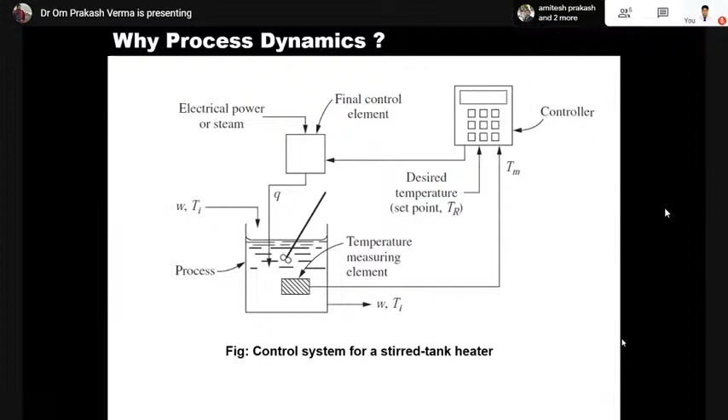Based on that, we understood the difference between the open loop system and the feedback system, and then we discussed the feed forward control system and feedback system.

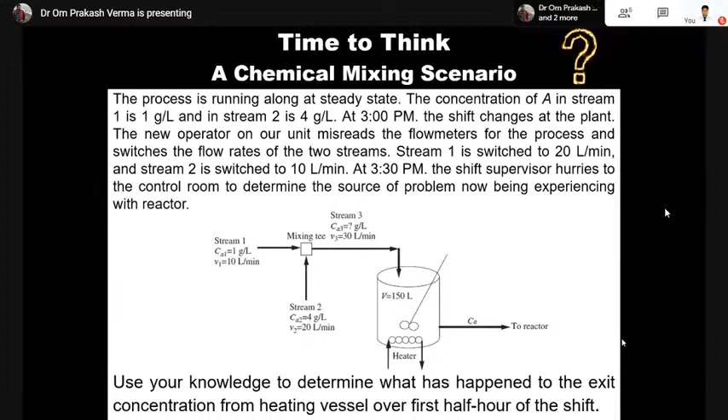Then we discussed some questions on why the process industries are important, and to that end we discussed the problems regarding operation control for the process industries, including heat transfer and mass transfer type problems.

Then we saw the transients, discussed different types of process models, and discussed the different types of modeling equations—which types of equations usually occur or are developed in the mathematics for the system model.

The system model generally consists of algebraic models, ODEs, PDEs, and combinations of these—maybe a combination of ODE and PDE, or all three together. Then we discussed the types of models in terms of linearity and non-linearity.

Then we discussed static and dynamic systems. In the dynamic system we discussed the accumulation term, and we discussed the case where d/dt in the dynamic term equals zero.

Then we discussed lumped parameter and distributed parameter models, and solved one example using distributed parameters for heat conduction in a solid.

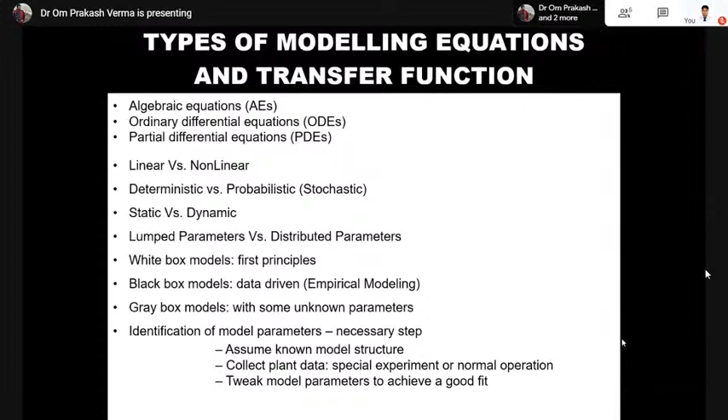Then we discussed the different types of models using white box, gray box, and black box approaches, and also looked at a regulator type problem.

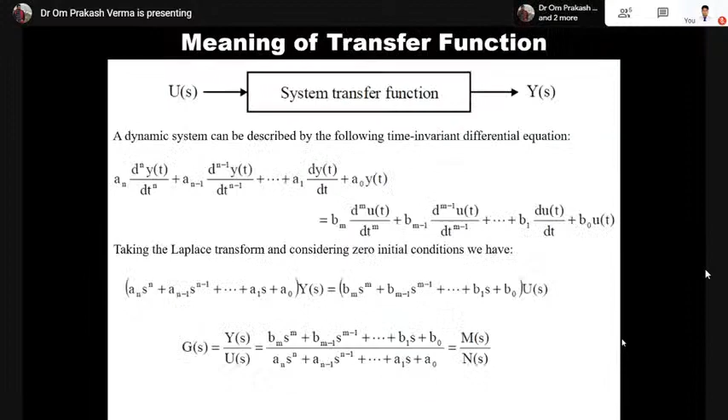Then yesterday we discussed the transfer function—the concept of transfer function, what is the meaning, the real meaning of transfer function.

We developed some equations for an electrical system, then a mechanical system, and I gave one example as an assignment, but due to the unavailability of the PPT we have not solved it yet. I know, but try to solve it today—I will give this PPT to all of you, so try to solve this puzzle.

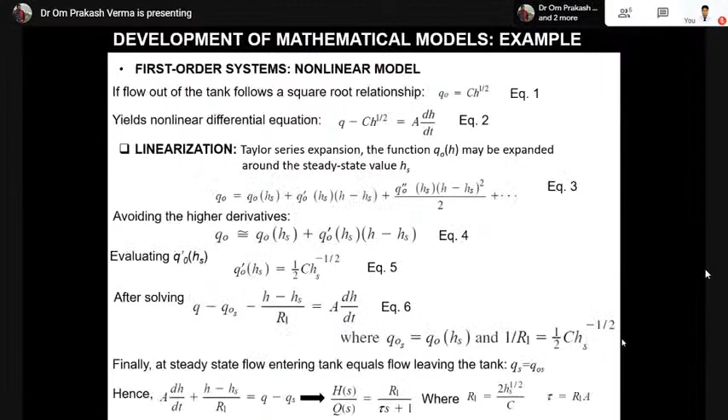Then we discussed the first order transfer function of the liquid level tank, and then linearization techniques. We will discuss these things more after some time.

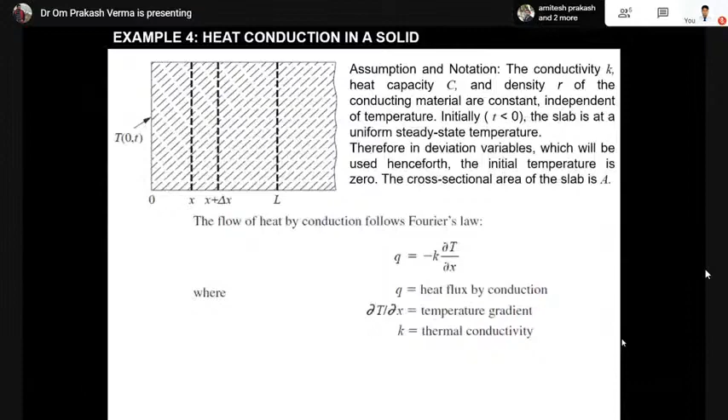Then we discussed the distributed parameter model, that is the heat conduction of a solid, and concluded with the state space equation—how the state space equation has been written for the mass spring damper system. So I am starting again with this PPT.

In the state space equation, what we learned in the spring mass damper system, which is basically a mechanical system: when we write the equation for this system, the force acting on the mass is ma, that is m into d2x/dt square. The force acting on the spring is kx, and the damper force is bv, damping coefficient into velocity, and that velocity is written in the form of dx/dt.

Here the displacement is written in the form of y, however the force is acting in terms of u. So when the equation is rearranged after writing, then this is written.

When you multiply this, it becomes ma, then f dx/dt—this is the damping force. Generally in the book, B is written; we have used the symbol f, but there is no problem, both are the same. However, the key is the Hooke's constant, that is the spring constant, k into x. So this is basically the force.

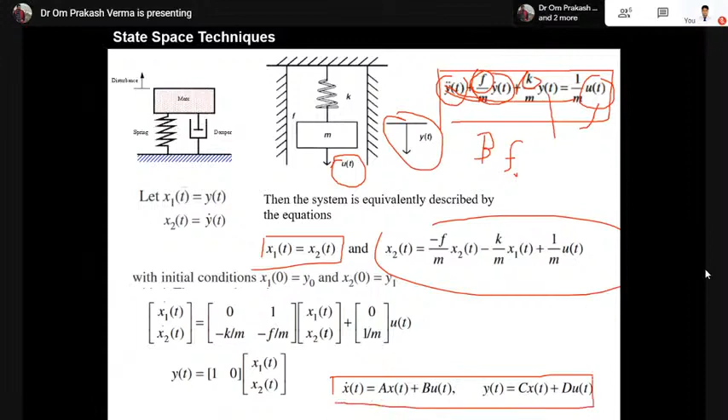So when you generalize the state space equation, I'm not going into details of it because this will be taught in the class, your teacher will teach it in the class. So I will just take the overview, so that we can cover more and more topics that are not usually covered in the class, more aspects of the control system that will not be covered in the class.

So x1 dot is equals to f(x1), this one. This is a generalized equation, whereas x1 is the state variable and u is the input, and similarly for here and similarly for the n variable.

So when written in vector form, x is a vector and it comprises of x1 to xn, where x is x1 to xn, and u is u1 to um.

So how is the matrix equation written? x1 dot is equals to a11... you can see here x1 dot is equals to a11 into x1, and similarly we can write here. X1 dot is equals to a11 into x1, a12 into x2, a13 into x3, and so on, a1n into xn. Similarly we can write all the equations. That is your state equation.

So finally, the compact equation we can write like this: x dot is equals to Ax plus Bu, y is equals to Cx. Okay, so now see, I will try to develop one.

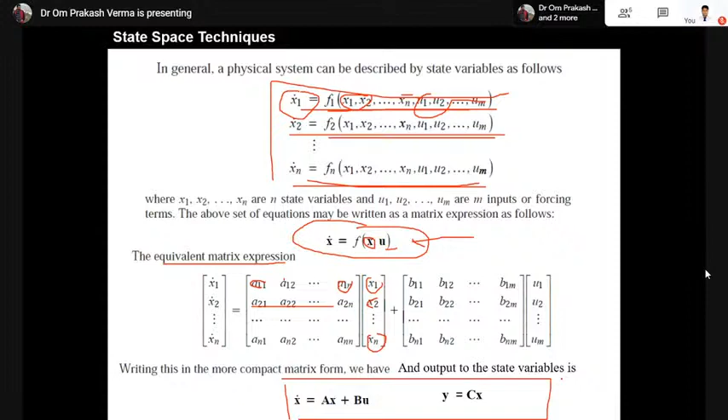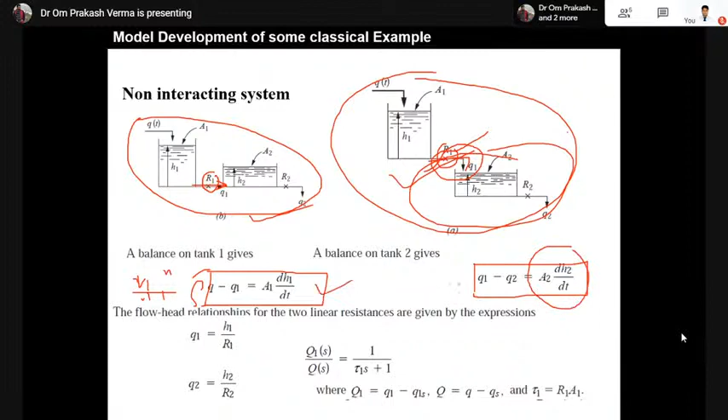As we know, if the valve R1 shows linear characteristic, then the equation is written as q1 equals h1 by r1. Similarly, when you write the equation for the second tank, q2 equals h2 by r2, and this equation is only valid for the linear system. So put this value of q1 and q2 in, and solve the two equations.

After solving the equation, we already know from the first system what q1 is, the output flow rate, and what the input q is. So the transfer function, I am repeating once again, is the relationship between output and input in Laplace transform, taking all initial conditions as zero. We have already discussed why the initial condition is zero, why we have taken the Laplace transform, due to the need of the system. We could also take the Z transform, but we have to establish the relationship between output and input, so therefore we have taken this.

So now the q1s upon qs becomes 1 upon tau 1s plus 1. No problem, and we have already solved h1s upon qs as equals to r1 upon tau 1s plus 1. In the previous slide we have already discussed this.

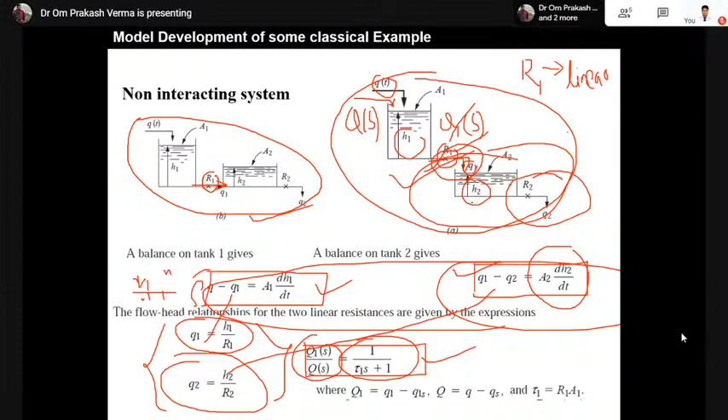So what is h2s upon q1s? Similarly, as h1s upon qs becomes r1 upon tau 1s plus 1, h2s upon q1s, that is the level output upon input flow, makes the relationship r2 upon tau 2s plus 1.

So putting all this together and solving, you get the final output, the level of tank 2. We have to control the level of tank 2 with the input, the first entering feed flow, qs. So ultimately the relationship q2s, h2s upon qs, becomes r2 upon 1 plus tau 1s, into 1 plus tau 2s. So you can see this is nothing but a second order system.

Second order system, how is this a second order system? When you multiply this, it becomes tau 1 tau 2 s square plus tau 2s plus tau 1s plus 1. And when you solve, it becomes R2 upon tau 1 into tau 2 s square plus tau 1s plus tau 2s plus 1. So this is your final equation, and this is the standard equation in terms of any second order system.

Now the time for some simulation. I want to discuss here the response time, the response of the two tank system.

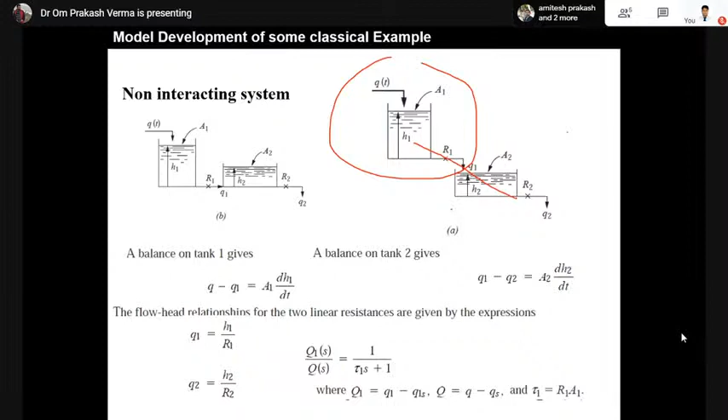Once we said this is your basically one single tank system, and when it comprises two tanks, it becomes a double tank system. So when we compare the response of the one tank and two tank system, obviously the one tank system is faster. The response of the single tank system is faster than that of the two tank system. So how is it? How can we find the response?

So in MATLAB you can write your code, otherwise you have to make a Simulink model also. With the help of the Simulink model, you can find the response of the system. Suppose this is the q, this is the step response. We will discuss what is the meaning of the step. Just to see what is the step, we are applying some staircase of input.

Okay, the staircase input has a unit magnitude of 1. In MATLAB, we just put in the values of the transfer function. Let's say tau 1, the first time constant of the tank, is 0.5, and the second is 1. When you simulate the system, this is an open loop system since we have not used any controller.

Similarly, this is the single tank system for the first tank. When we take the single tank system and compare the response on the screen, the output will come here. You can see this is the one tank system response, and this is obviously the second, two tank system response.

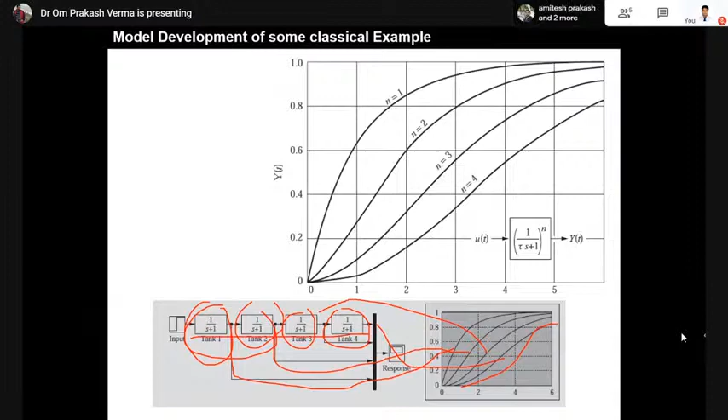When it is single, the response is like this. When it is two, the response is like this. When it is three, the response is then like that. And when it is four, the response is like that. So as you can visualize, as the number of tanks increases, the response of the system decreases. Now let's come to the interacting system.

Now another interconnection, another arrangement of connecting the two tank system, is this one. In this system, the output of the first tank enters the second tank with the help of some pipe. We are sending it using this pipe. This connection is basically known as an interacting system.

What happens basically is the flow rate here is Q1, let's say, and this is entering into the second tank. So what is the equation for tank one? Q in minus Q1 out equals whatever the accumulation is into the tank. Obviously for the second tank, Q1 is entering and Q2 is out, so we write in minus out equals whatever the accumulation into the tank.

Now the relationship of R1: since R1 is linear, it is dependent on this height and this height also. I'm repeating once again, this R1 is basically linear in both cases, we have taken the same, and R1 is basically a function of H1 as well as H2. As H2 or H1 changes, the resistance of that valve will also change.

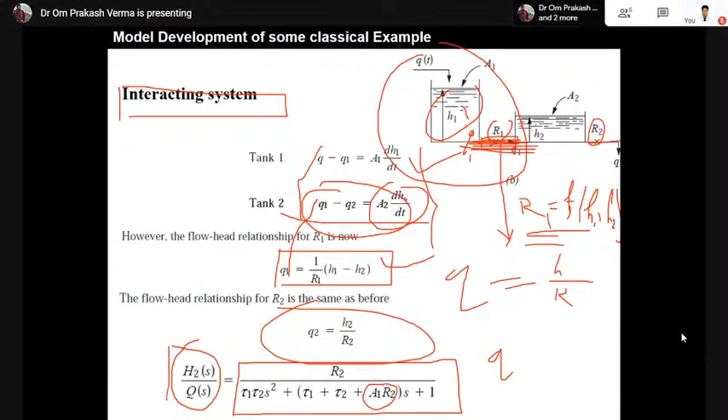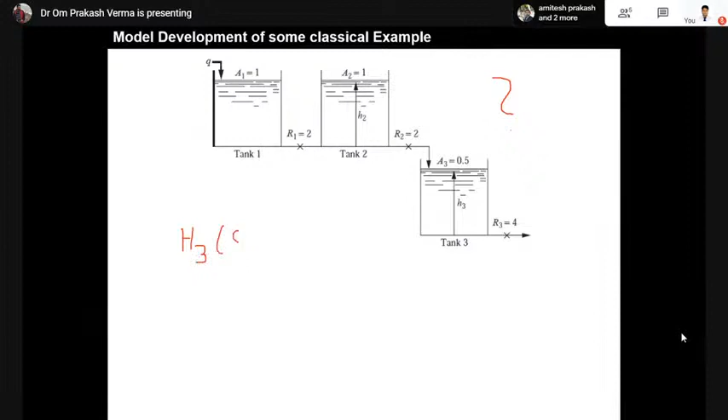Okay, so now your target, this is again a puzzle, so you have to solve this question. You have to develop this model and try to find out the transfer function H3 S upon Q S. Try to solve this transfer function. So this is one of your assignment problems. Try to solve it. If you practice such types of problems, then you can solve any type of model. This is usually used in the process industries.

We have already discussed that the state space equation is applicable for the non-linear system also. However, the transfer function is not available for the non-linear system. Also, the transfer function application is simply not applicable to the MIMO system, that is the multi-input and multi-output. However, that is only restricted to the single input, single output.

However, this is applicable for the multi-input and multi-output variable system. And one of the greatest advantages of using the state space technique is that we have written the equation in the form of some matrix, and MATLAB or whatever computer simulation generally uses matrix multiplication, matrix addition, and other types of matrix applications. Therefore, we are using this.

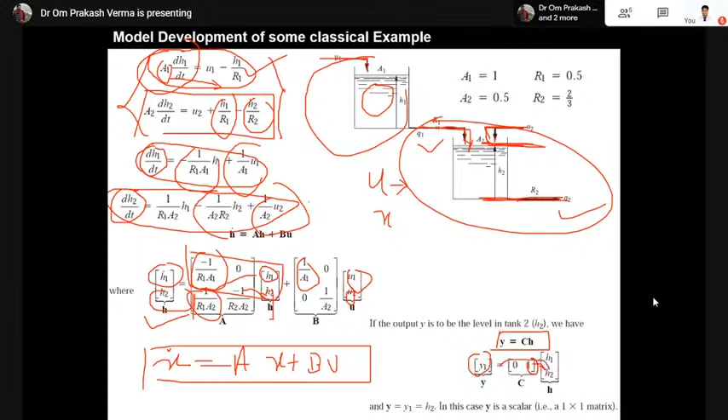We have to ultimately control this level h2. So simply, Y is equals to h2. So this one is the equation.

So y is equals to, we can write here C into X, plus somewhere we have written D U. Generally D matrix is 0, but this is the ultimate final format for the equation.

Okay, sorry for the interruption. Done. Wait for a minute. Wait. Sorry. Is my voice audible? Is it fine, Amitesh? Is it fine?

I think yes, sir, it is going smoothly. Yeah, okay.

So this is the final basic format: x dot equals Ax plus Bu, y is equals to Cx plus Du. And yesterday we already discussed why we have written the title ABCD of process dynamics.

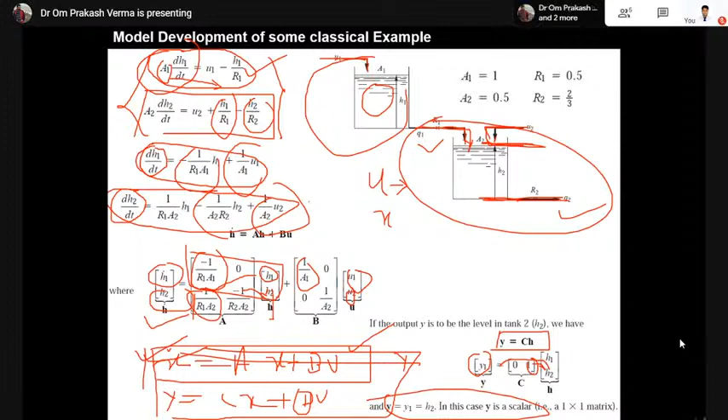So basically the state equations you have studied in the class will be the basic of control system in the third year. But once you get the knowledge of the basics of control system and enter higher study, you will encounter only the state space equation. So from the state space equation, the real control system starts. There's no problem.

So now we are entering into the world of transient traces, basically time domain analysis. In time domain analysis, the response of a dynamic system to an input is expressed as a function of time. Basically, we want to find out the transient of the system.

After applying some input, such as here, see this system. Let's say this is the transfer function, this is the flow rate, and this is the change in level of the second tank system. So when we change the input in tank one, the level of tank two will change accordingly.

So for getting some saturation for h2, it will take some time. So during that time, how much it will take for saturation, for settling, we have to analyze. So for that analysis, we have to supply some input and check what happens with the output.

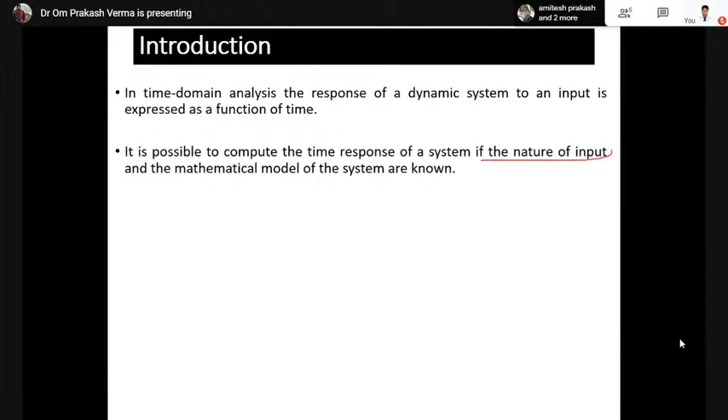For that purpose, we want to study time domain analysis. It is possible to compute the time response of the system if we know the nature of the input - what we are supplying as input - and second, the mathematical model of the system. I think we are enough equipped to understand how the mathematical model of the system is developed.

Now usually the input signal to a control system is not known fully ahead of time. In a real time system, the nature of the input we are going to supply is not known, how it's going to change we don't know. So we just take some classical testing signals and apply them, so that we can test the output response to the input. It is very difficult to express the actual input signal mathematically by simple equations.

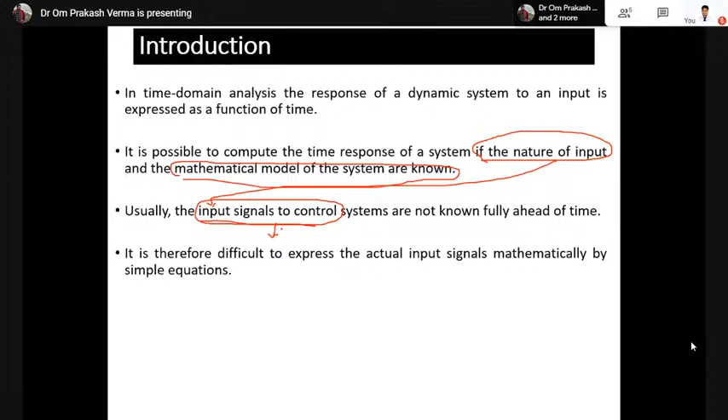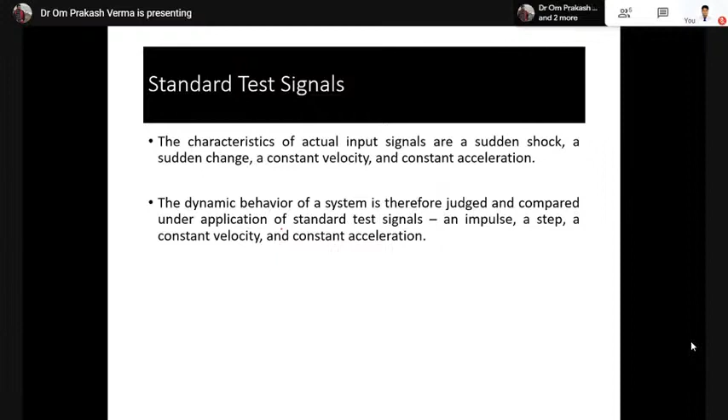However, we have developed some relationship for that input. The characteristic of the actual input signals is how suddenly the input is changing. So we analyze the different natures of the input, and try to mimic or develop such types of input in terms of mathematics. Once we develop the mathematical model and find the input, we apply it into the transfer function or model and visualize the response, the open loop response, as we already saw in the coupled tank system, whether interacting or non-interacting types.

So the general nature of the input is like a sudden shock. Sudden shock means, let's say at t equal to 0, in a very short time, the magnitude or value of the input is very very high at t equal to 0, then it is like a shock.

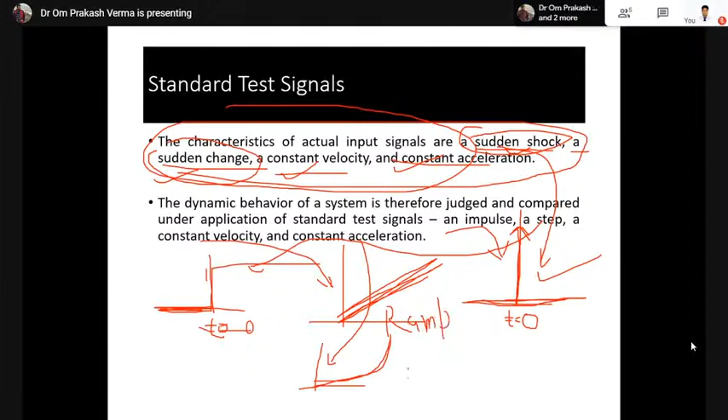So the important inputs are sudden shock and sudden change, though these others are useful but less important; our focus is mainly on sudden shock and sudden change. The dynamic behavior of a system is therefore judged and compared under the application of these test input signals. This input signal is known as impulse, this is the step signal, this is the ramp signal, and this is the parabolic. Impulse means it is a very high value in a very small time, and this is the step input.

Now the other standard signal of great importance is sinusoidal. Sinusoidal signal is also one of the inputs we are applying, but I have not included it in this PPT, it is very important though. I will try to give one example using the sinusoidal so you can visualize the problems very easily, and why we are using such type of sinusoidal input.

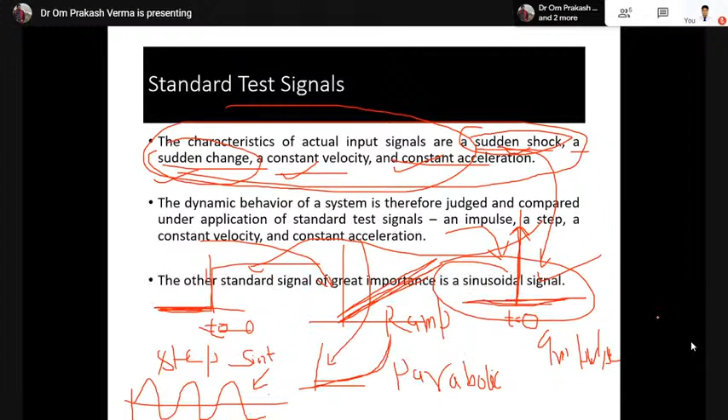Now come to the mathematics of this test. These are very basic signals you have already studied, I think, in signal systems, but if you don't know this, it is my duty to introduce it. So this one is the impulse signal, at t equal to 0 the value is very high. Mathematically, if you studied in signal systems, this is represented by minus a by 2, this is a by 2. The concept is like this.

Okay, and the magnitude is, I think, sorry, sorry.

Okay, so this is minus a by 2, and this one is a by 2, and then 1 by the magnitude of this one is a, 1 by a. Now what is the concept here? The concept is, listen very carefully, it is very important for your engineering problems, because you are electrical engineers, so you should know this one. What is this?

As you decrease this, what we have to do, basically the area of this region, the area of this pulse signal is fixed. So we have to fix this one and change the width. So ultimately, if we want to keep the area one, and let's say this approaches this side and this approaches this side, then we have to increase this value, agree? So we have to increase this value in order to make the area one, as we have reduced this width.

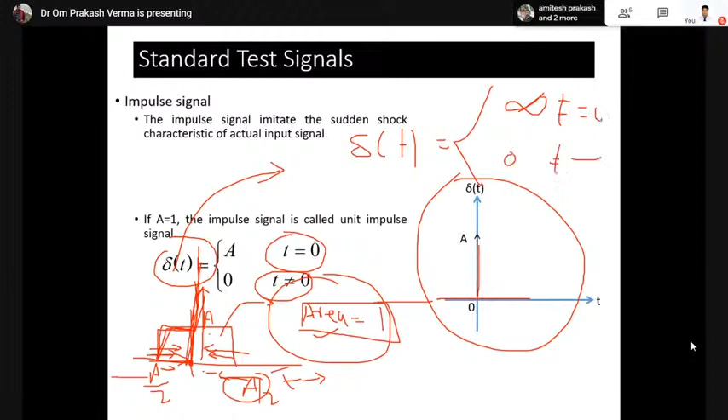This is the concept of the step, sorry, impulse signal. So this one is basically the concept of the impulse signal. So delta t is basically defined at t equal to 0, and t not equal to 0, the value is 0. However, this is also defined like this: delta t is nothing but the value is infinite, infinite at t equal to 0. However, the value is 0 at t not equal to 0, right? So this is also one definition. This is the unit impulse, and if it is not defined, then it is impulse signal, right?

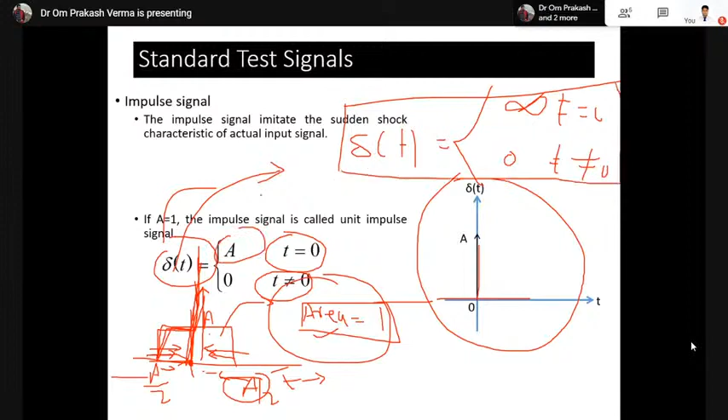Okay, now the step signal. The step signal is what I have changed. This is the change in the input, as before zero, the value was zero, and suddenly at t equal to zero, the output is changed to one. But such type of thing is only mathematics, but never ideal. This system can never be realized, because it is a non-causal system.

And the amplitude, when you read the signal system, then you will get the, once there is a phenomena, Gibbs phenomena. And using the Gibbs phenomena, if I ask a question, a very popular question: what is the value before t equal 0? Before t less than 0, the value is 0, no problem. And then greater than 0, the value is also a, no problem. But what is the value at t equal to 0? Mathematically it is written as a, but exactly it is either 0 or 1 a, you can't say anything.

Because this is discontinuous at t equal to 0. The function is discontinuous, and since the function is discontinuous, you can't be able to find the value. So according to the Gibbs phenomena, we are taking the average value. So the actual value at t equal to 0 is a by 2, the average of this one and this one. Average value we are taking, but for the mathematical convenience, we have taken this value a. So u(t) is equals to nothing, u(t) is equals to a and 0. So this is the definition of the step input, right?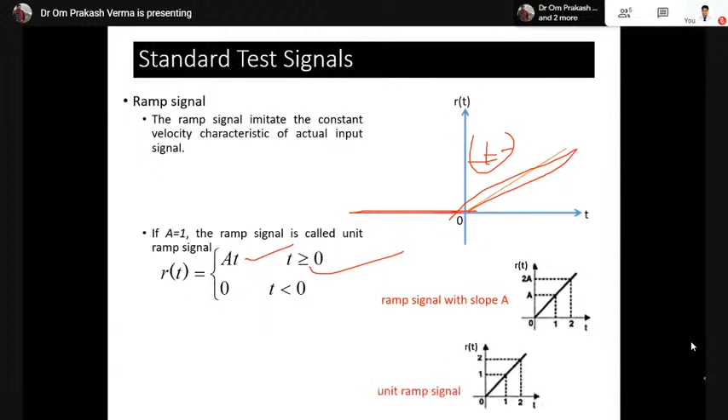Now come to the parabolic signal. The parabolic signal is nothing but at square by 2, for t greater than 0, and less than 0 the value is 0.

So this is the conclusion of what we have studied: impulse signal, step signal, ramp signal, and parabolic signal. Now there's a relation between them that we want to develop.

Let's integrate the impulse signal, del t, equal to 0. At t equal to 0, this value is, let's say, a, and this is from t equal to 0 to t equal to infinity. Now we integrate this value at the continuous points, so what we got is an equation like this, and this is basically integration.

So when we integrate del t, then you get ut, and what is the integration of a dt? When you integrate this one, you simply get at, sorry, you get a, and when you integrate this one, you get this one.

Similarly, if we take the differentiation of this one, then you get the relation rt, and when you differentiate rt, meaning at, you just get a. So this is the step signal, and when you integrate the step signal, as we have discussed already.

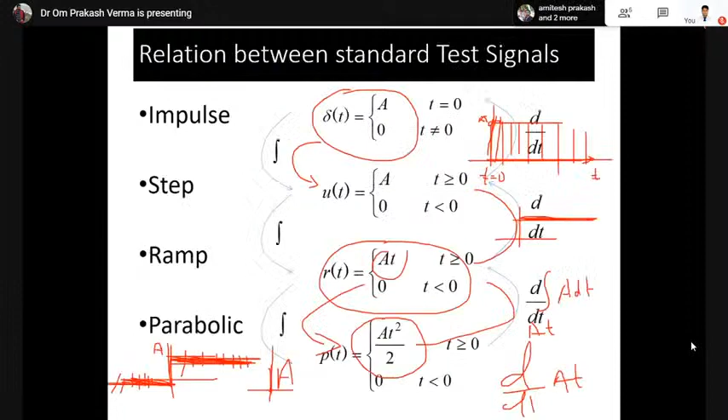Now come to the Laplace transform. How do you calculate the Laplace? Laplace transform of ft, L of ft, is nothing but the integration from 0 to infinity of ft into e to the power minus st dt. So this is the formula.

Now when we use the impulse input, we take the integration from 0 to infinity of a into e to the power minus st dt. Using the properties, at t equal to 0 we have to put the value at t equal to 0 and find the value a into e to the power 0, which is 1. This is the property for the function of the impulse signal.

You must read about this in signal systems. So the Laplace, the final conclusion, the Laplace transform, if it's not clear to all of you, try to read these things in the literature or books. The Laplace transform of the impulse signal is nothing but the same value a. However, if you take the Laplace transform of ut, that is a, then it comes to a by s.

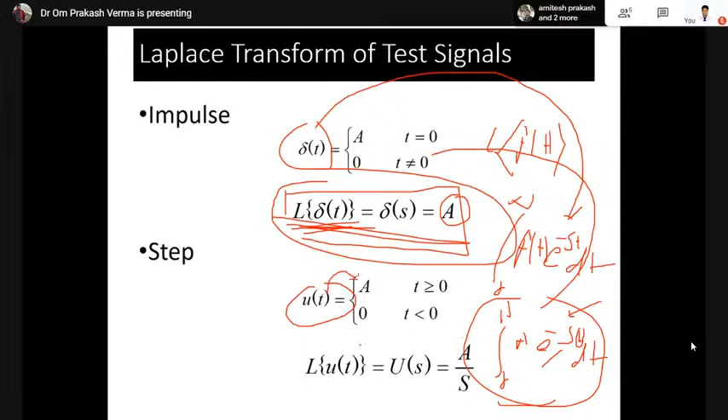And what about the ramp signal? You can find out the ramp signal, there's no problem to find this, and the same applies for the parabolic function.

Now come to the response of the system, this is very important. So, time response of dynamic system. What is the meaning of dynamic system? It is nothing but a system comprised of differential equations, generally first order differential equations. So all the control systems we have seen already are either first order systems or second order systems. Based on that, the response comes. So see, this is the step signal, and when we apply it to the system, the system responds.

System responds like this one. So this is the time domain analysis. When you're supplying some input with variation of time, then you get some output with variation of time also. Now there are two types of analysis of the control system.

First is the time domain analysis, time response, as we have written. Second is the frequency response. When we apply some frequency input, we get a response, the frequency response. We have not included the frequency response in the present course.

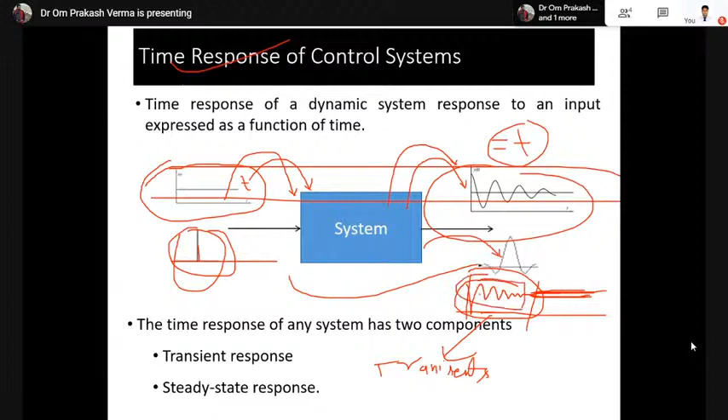You don't want any transients, so the target is to maintain or achieve the set point as soon as possible, the desired value as soon as possible, without wasting time. So our ultimate target is to remove this transient.

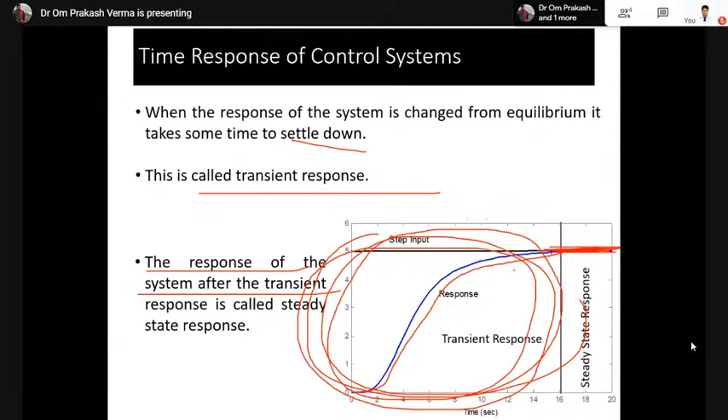So when the response of the system is changed from equilibrium, it will take some time to settle down, and this is called the transient. This is the applied input, and it will take some time to go there, and once it is achieved, this is settled. There's no problem, but we have to achieve this value as soon as possible, so this is our target. The response of the system after the transient is called the steady state response. This is the steady state response, and this is the transient response.

So the transient response depends on the system poles only. It means for the analysis of the system, it is not only the poles, basically it is the closed loop poles. In GATE, one problem was generally asked, I think in 2007 or 2008, I don't know the exact date.

The transfer function Gs is given, I think. Okay, it is given like... the transfer function of any system is given by 1 upon s plus 1. So your target is to find the type of the system and the order of the system, type and order. You have to evaluate or compute the type and order of the system.

Remember always, it is a very important concept and is always asked in the GATE examination. The type of the system is used for the steady state analysis. Steady state I have not covered here yet, I am just introducing it to you. This is used for the steady state, not state space, steady state. And the order of the system is used for the analysis of the transient.

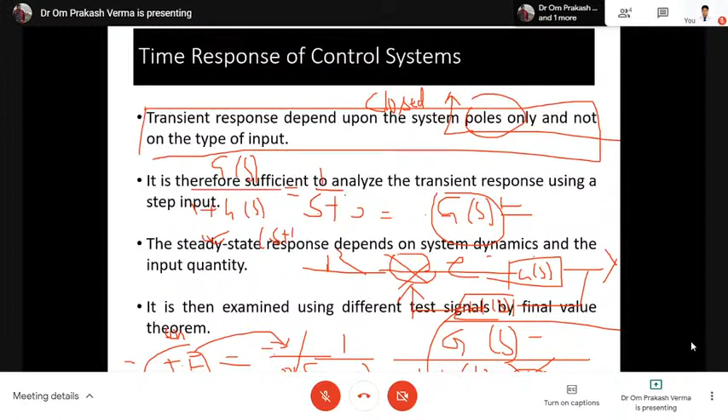So the transfer function of the closed loop system is given here, 1 upon s plus 1, and this is the closed loop system. Now we have to convert this closed loop system into the open loop transfer function GS, so we can find out. Let's say this value is x, so with the help of this, you can calculate this.

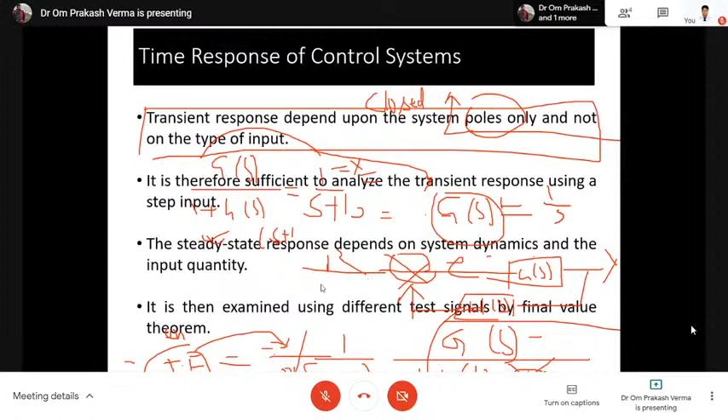So when you solve, you got 1 upon s, I think, something like that. So you can solve. So ultimately, the final answer is the type of the system and order of the system of this problem is basically one. The type is also one, order is also one. However, from the problem, it is looking like this is the output - the type is zero. So I think it is clear to all of you.

The transient response depends upon the system poles only and not on the type of input. It is therefore sufficient to analyze the transient response using step input. The steady state response depends on the system dynamics and the input quantity, which I will discuss and examine.

Now see, this is a first order system, and there is one pole. What is the location of the pole? S equals minus one upon T. So the gain of the system is K, however, the time constant of the system is capital T. So this is the first order system.

Now we will start with the input. We are taking the step response. Generally, we take two types of input: delta t, that's the impulse response, and u(t), that is the step response, as we have discussed a few minutes back.

So DC gain of the system, what is it? This question has been asked in the GATE problem, 2007, 8, 9, 10, I don't know the exact year, but the question has been asked: what is the DC gain, given the transfer function. So the DC gain of the system is the ratio between the input signal and the steady state value.

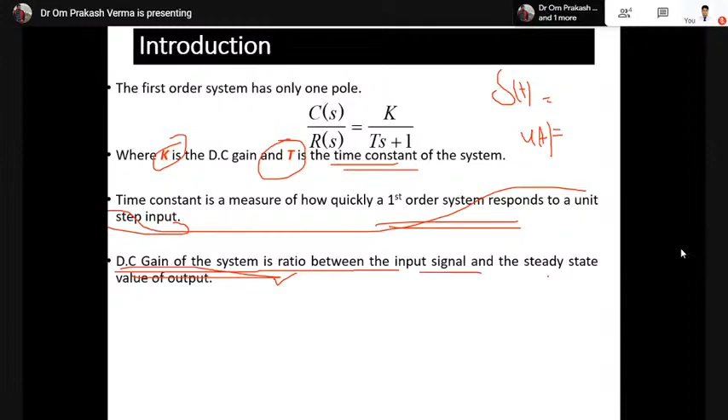Steady state value. So let's say this is the problem, G(s) equals 10 upon 3s plus 1. So now the tau is 3 seconds, and the DC gain is 10. That's no problem. For the following system, what is the gain, DC gain, and constant?

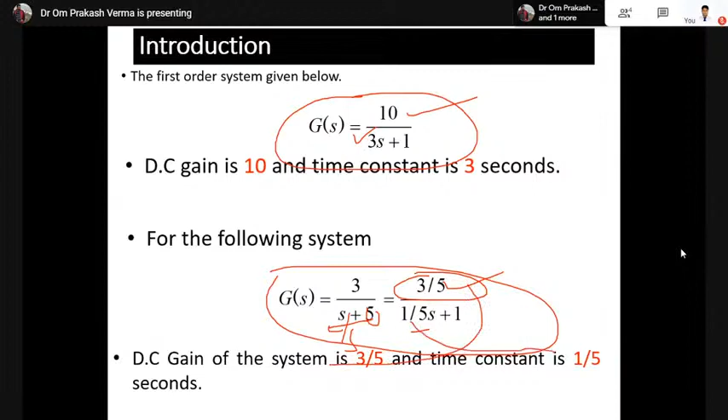So S plus 5 is given. You can take the 5 common. This becomes 1/5 s plus 1, and 3 by 5. So the DC gain is this one, and the time constant is this one. These are problems. Now see the impulse response of the system.

Impulse response of the first order system. So what is the impulse response of the first order system? Let's say we have taken the impulse input delta t, and the Laplace transform of delta t is one. Delta t is one.

As we have discussed, delta t equals A at t equal to 0. The Laplace transform of this one is again A. So if the input is 1, the Laplace transform of this one is also 1, right? So this is the unit impulse signal, as we have discussed earlier.

Once we supply the unit impulse input 1 as the input, after this calculation we have to find C(s). You have to remember: the multiplication in time domain is always equal to the convolution in frequency domain, and vice versa. The convolution in time domain is equal to multiplication in frequency domain.

So here the response is nothing but the multiplication of the two signals. But in the time domain, it is the convolution. The output is the convolution of two signals. However, in the Laplace transform domain, since Laplace is basically frequency domain, it is a multiplication.

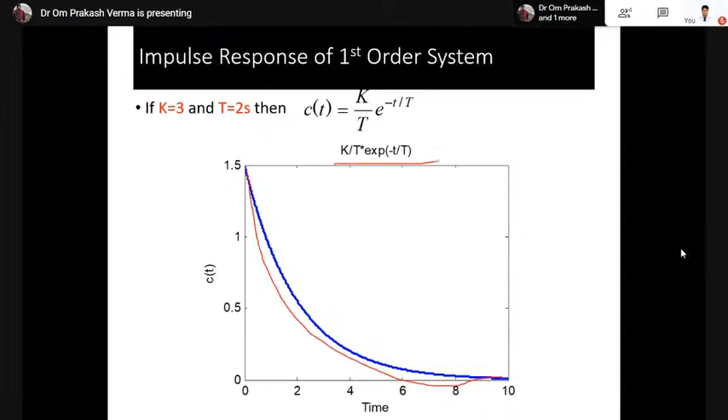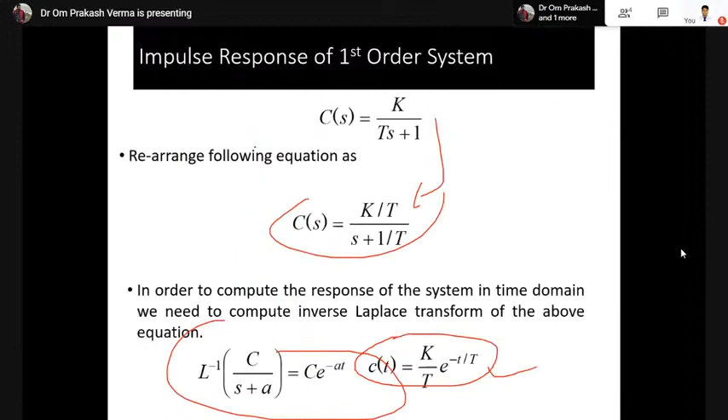Now, when you take the step input instead of the impulse input, just take the step input. We already said the variation in input is like a certain shock or certain change. So we tested the certain shock here with the impulse input.

However, here we have tried the response with the help of the step response. So step input is applied, so this is 1/s.

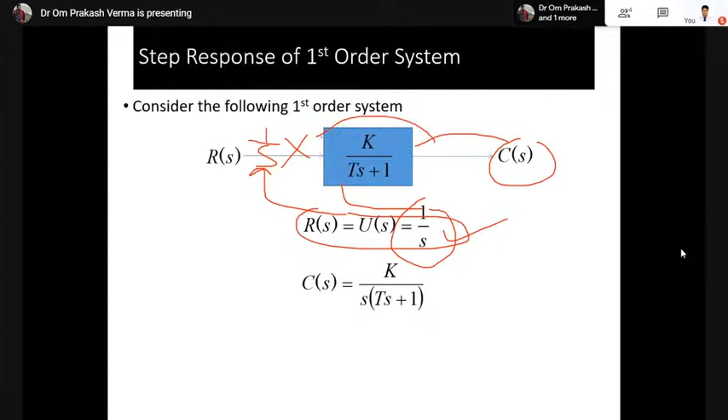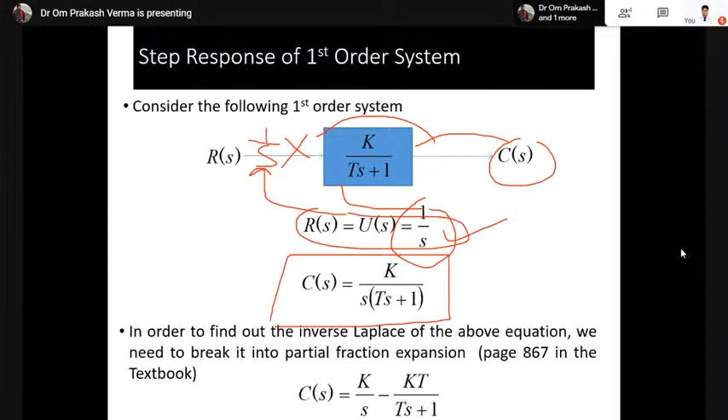The C(s) is the multiplication of this quantity with this quantity in the Laplace frequency domain. However, when taking that in the time domain, it will be the convolution. So when you multiply this one and take the inverse Laplace, then you get the equation C(t) equals this one. No problem in this one.

Time constant decides basically the speed of the response of the system. And basically this speed will decide the time constant. With the help of the time constant, the response is fast or slow, we will see the effect of that time constant on the system. So 1 upon tau s plus 1, you can check

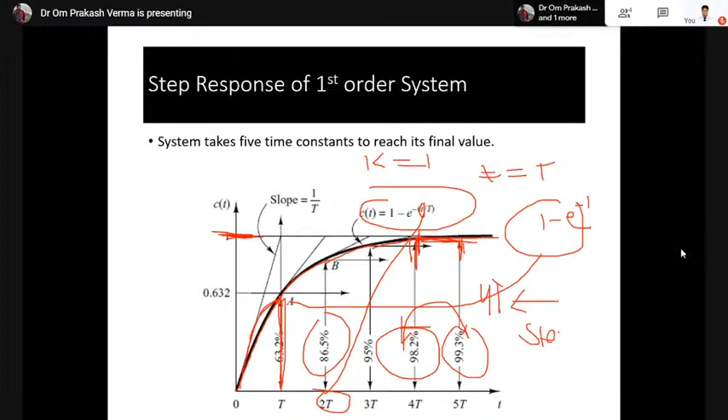Time constant is low, it means what? What to conclude? Our target is to achieve this steady state as soon as possible. It means we have to make the time constant very small, as small as possible in the limit, in the constant, also in the allowed value. Minimum doesn't mean zero or something, it should be minimum, but within the limit, satisfying all the conditions of our parameters.

Now see, here we have the variation in t. Now we are varying with t as a constant. Now we are varying, we have considered t equals to 1 and taking the gain as varying. When the gain k equals to 1 and k equals to 10, k equals to 5, k equals to 3, k equals to 1.

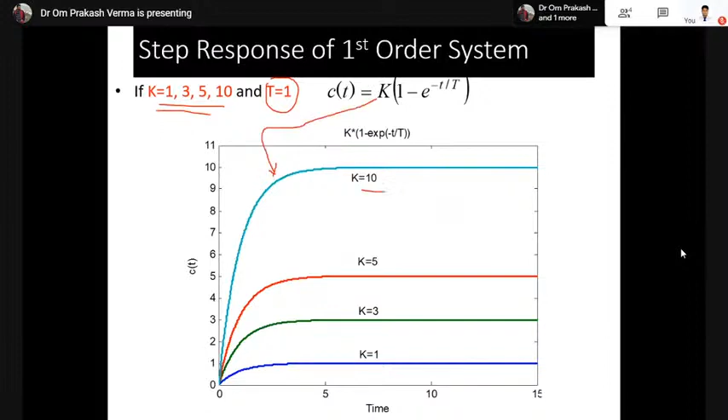The set point, it will change the set point, uplifting or downlifting the amplitude of the system.

Now the practical determination of the transfer function of the first order system.

So generally, when you encounter problems like the Ziegler-Nichols or the Cohen-Coon method for tuning the PID controller, which we will see tomorrow, in such problems the response is based on industry examples. Let me illustrate with a simple example.

Suppose we have to control some parameters, temperature or level or flow of any process. First you visualize the open loop response of the system, then you apply some control, say a PID controller with some settings. After tuning you get some response, but you find that the response is not satisfactory. So your target is to manipulate the tuning settings or parameter settings of the controller, to change them until you achieve a satisfactory response.

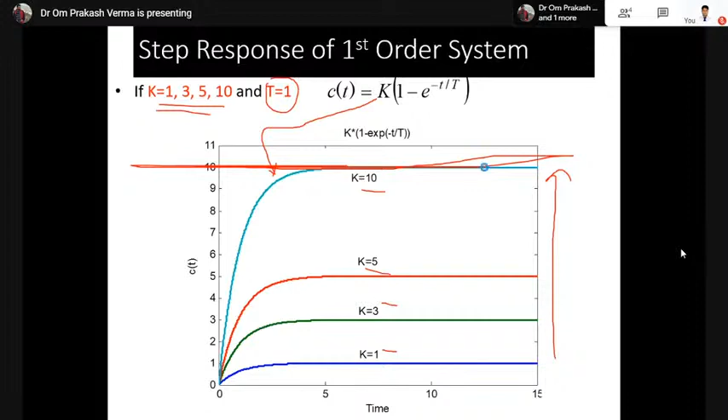So my conclusion is this: you have to calculate and compute the mathematical model with the help of the response. Whatever response has occurred, with the help of that response you have to develop the model. Okay, let's see one example.

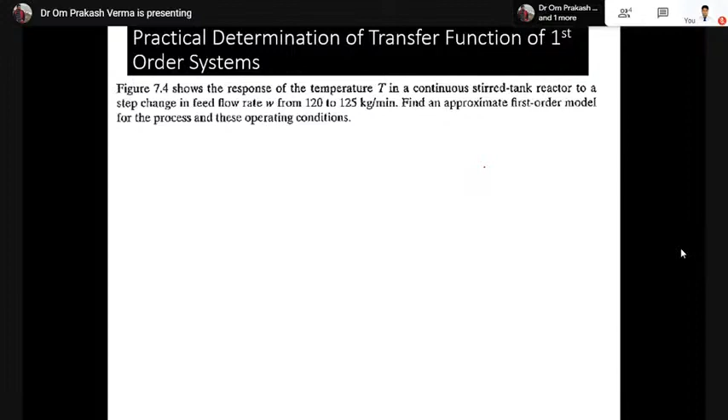I have taken this example from the Seborg book, Process Dynamics and Control. Figure 7.4 shows the response of the temperature T in the continuous stirred tank reactor to a step change in the feed flow rate W from 120 to 125 kg per minute.

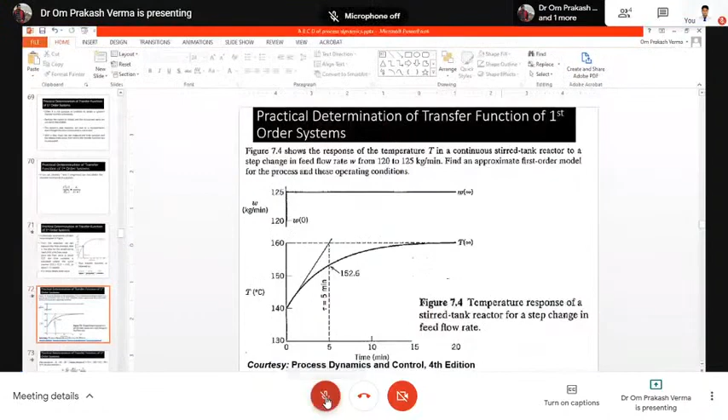Amitesh, we have time now, we can continue for 5 or 10 minutes. Amitesh, can you hear me? Hello, hello, Amitesh, Matthias? Mr. Anis, are you hearing me? Yes sir, I'm here. Okay, so we have 5 to 10 minutes, we can continue. Yes sir, sure sir. Okay, so I will take 5 to 10 minutes, then we will start tomorrow. I will take only 5 to 10 minutes to cover this. Okay, is my presentation visible to all of you?

Okay, so now I want to discuss one problem so that you can understand how the mathematical model can be developed with the help of the response of the system.

Let's say this is the response of a temperature control system of the stirred tank problem. This is the step change response we have got, with the flow rate changing from 120 to 125 kg per minute. The response of the system will change from 140 to 160, like this.

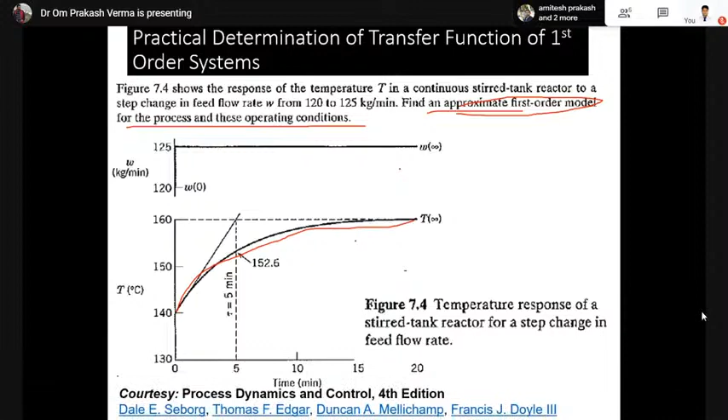Now our target is to design or develop the approximate first order model for the process and find out the condition. This problem is taken from Seborg, and the solution is like this.

So what is the change in input? The input changes from 120 to 125, that is a change of 5 units. However, the output changes from 140 to 160, a change of 20 degrees. The steady state gain is defined as the change in output upon the change in input: the output changes from 140 to 160 while the input flow rate changes from 120 to 125.

So this is 4 degrees Celsius per kg per minute. So this is K. Any first order transfer function is defined as K upon tau s plus 1. So you have evaluated the value of K. Now your target is to find the value of tau.

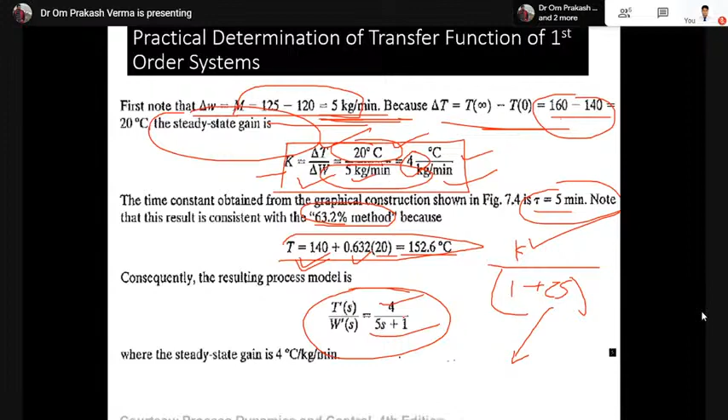Now come to the first order system with a zero. So as you know, the denominator will represent the pole and the numerator will represent the zero. Why such an equation is written, I will discuss tomorrow, because due to some problem of the controller, we realize the control in the form of some filter, using generally the derivative kick. This concept of derivative kick will be discussed tomorrow, where we will introduce such type of value.

Now there is a type of delay system. What is the meaning of delay system, first let's see. I will show you after this slide. But generally, always remember that e to the power minus td s - this is the transfer function for any delay system.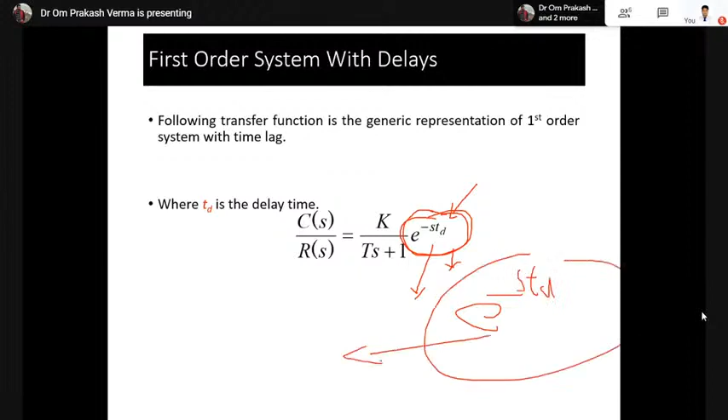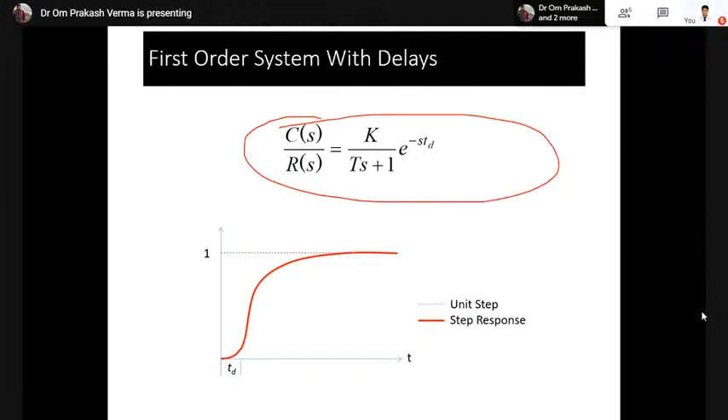Suppose this first order delay system is like this one, and the response of the delay system is this type of response. So now what is the meaning of lag, what is the meaning of delay system? It means you see here. Let me illustrate with one example.

Let's say this is a tube. We are supplying some feed here and taking the output from this side, as Q. This Q is entering here at t equal to 0. But at the same time you are not able to get the same value at yt. Yt will take some time to give the value Q. It means at t equal 0 you have applied some input, but at t equal to tau, it will give the response at this time.

Then similar with this one. So what is this time? This time is nothing but the delay time. What is the delay time? It means, suppose volumetric flow rate is nothing but meter cube per second. What is the volume? Volume is nothing but the meter cube.

So volume of the tube when divided by the volumetric flow rate, it will become meter cube cancel and second will come, and this is the delay system. The tau is nothing but A into L, that is the volume, divided by the volumetric flow rate. So for any pipe system, it is nothing but AL upon Q.

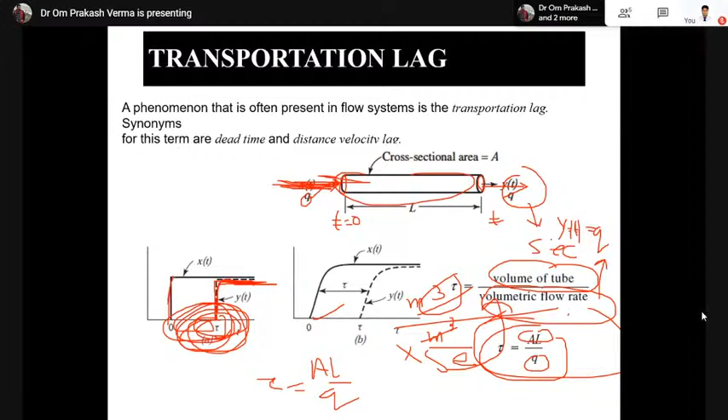You can write this with the help of signals, as we are already studying the signal system. What is the Laplace of this? The Laplace of this is e to the power minus s tau into xs. So Ys becomes e to the power minus tau s into xs. Now this is the output and this is the input. Taking the relationship between output upon input, it will come as e to the power minus s tau. That is demonstrated here.

Now come to some approximated value. Sometimes it is not generally written as e to the power minus s tau. E to the power minus tau s is maybe written like 1 upon e to the power tau s, and e to the power x is generally written as 1 plus x plus x square upon factorial 2 and so on. So this is the equation.

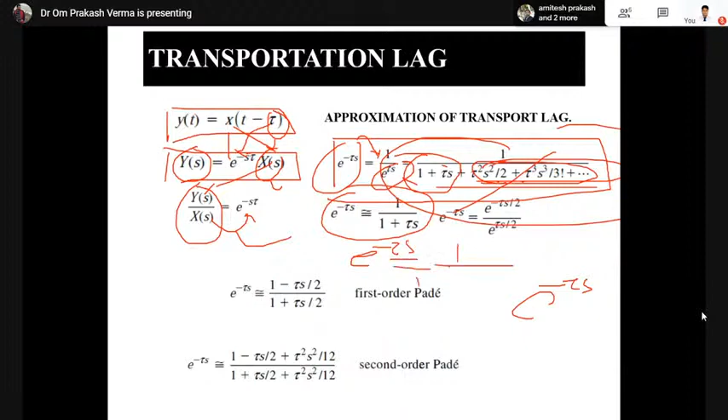Now if we retain, if we approximate this equation up to the first value, because if tau is very small it can be neglected. So e to the power minus tau s becomes 1 upon 1 plus tau s. One method of writing it: e to the power minus tau s is approximated as 1 upon 1 plus tau s.

The other method is writing it like this: e to the power minus tau s may be written as half portion e to the power minus tau s by 2, and half portion e to the power tau s by 2. Expanding this up to the first term, this approximation is known as first order Padé. However, if you take the second order term, then it is known as second order Padé. It is very important for process control engineers to consider the delayed response.

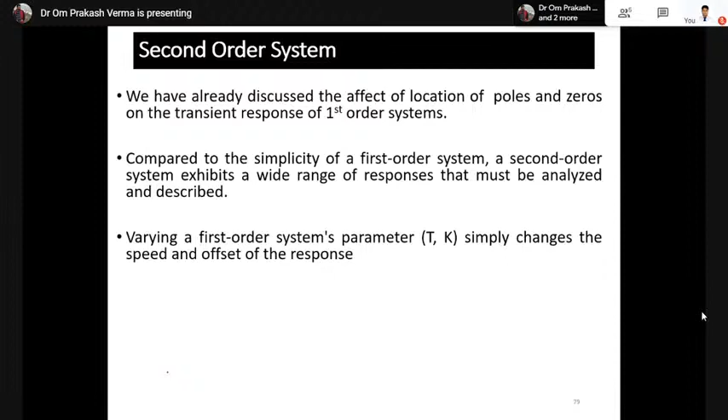This is the second order system. Now we will discuss further, but the time is going very fast, so I think we can continue this tomorrow.

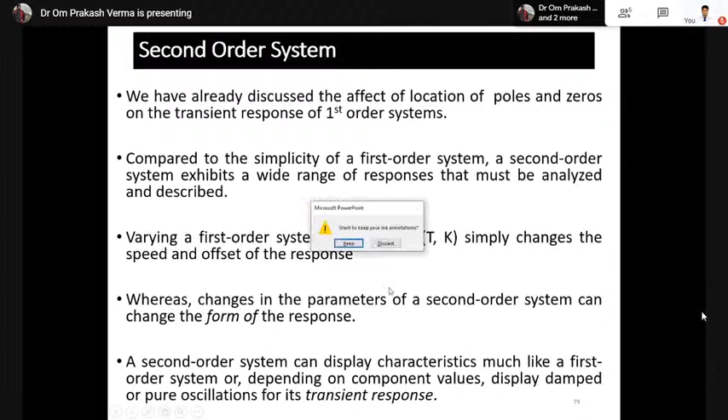Hello? Yes sir, query for today has been shared on your email. So can we stop here? Yes sir, the query for today has been shared on your email.

Okay, second order system we will start from tomorrow, and then we will try PID controller. If Amitesh allows to take one more day, then we can continue, so just talk with your principal and higher authority so that I can ensure permission is granted tomorrow, because the topic will be more clear to the students. Otherwise some things will be missed.

Okay, so I am just checking the response. Okay, so first, is it audible? Hello everyone, is my message audible?

Yes sir. Okay, so the first question asked from one student is about problem in the time response of the system. So what is the problem in time response? Basically there are so many problems encountered in the time response, because calculation with the time response is not very easy, especially when the system is higher order, and it is very easy to handle with frequency domain analysis instead.

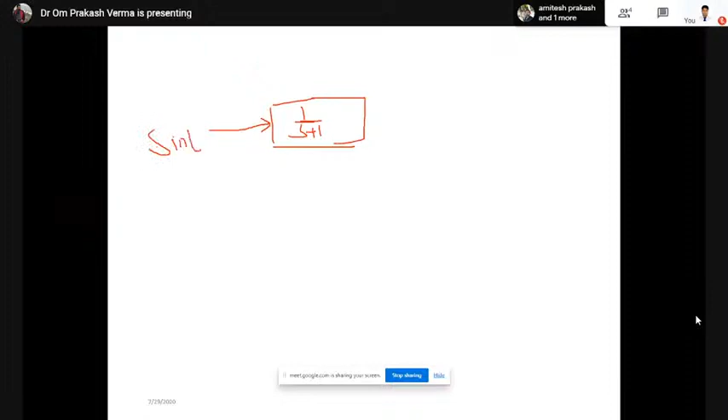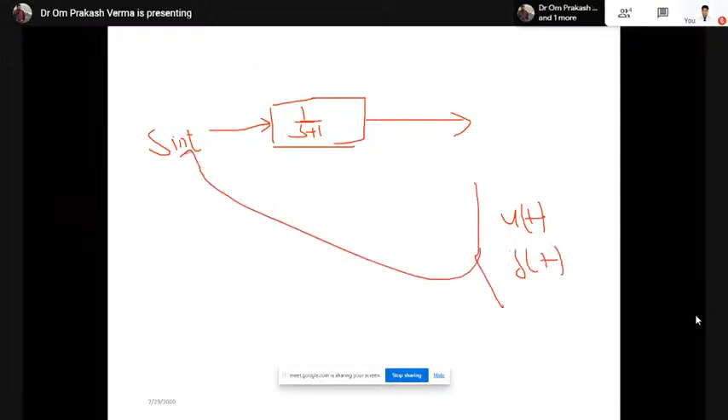The response of the system is calculated. One method is to convert sine t to 1 upon s square plus 1 using Laplace, then multiply this, and get the inverse Laplace. This question was again asked in the GATE exam in 2009 or 10, I don't know the exact year, but this problem has been asked already. So this 1 upon s square plus 1 approach is not a very good way to solve such problems.

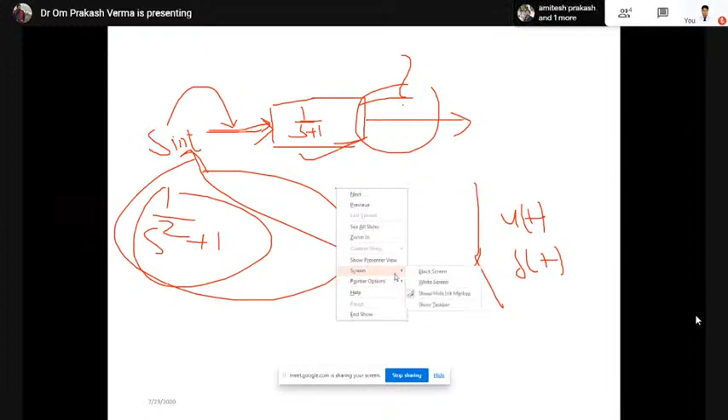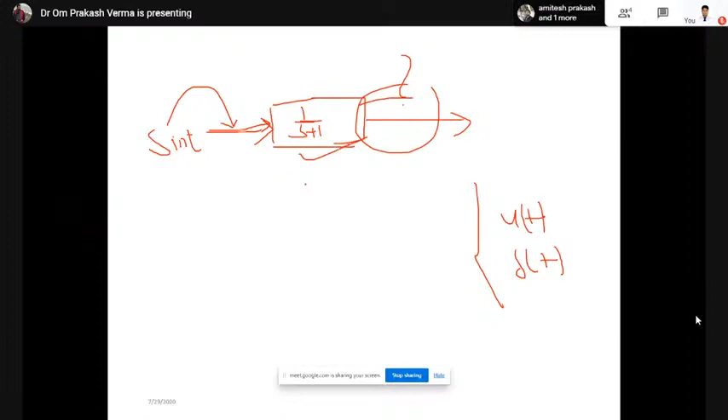There is a method to solve using frequency domain analysis. Using frequency domain analysis, you can find the solution of the response of the system very fast. The magnitude is one, and omega, the frequency of the system, is one. As you know, when the input is sinusoidal, the response is always sinusoidal. The only change is either the magnitude will change, or the phase shift will change, or some damping will come into the picture, or the equation changes.

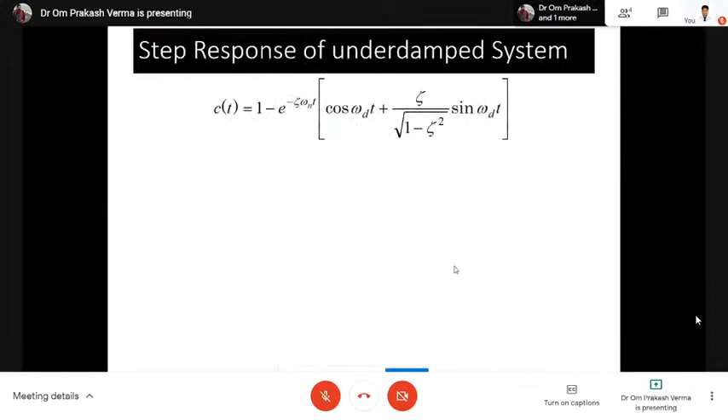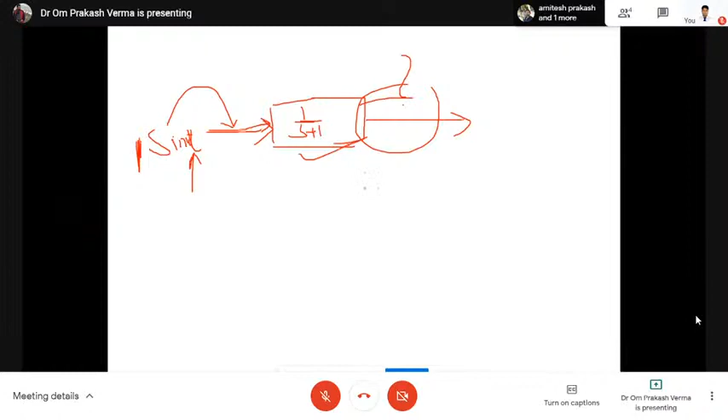If you see in this case, sine t is applied as an input. The magnitude is one, the frequency is one, so the output is again this. So only the magnitude and phase change, and the magnitude is here. You can write s equals j omega, and omega square plus 1 is the input. The phase angle you can calculate as minus of tan inverse omega.

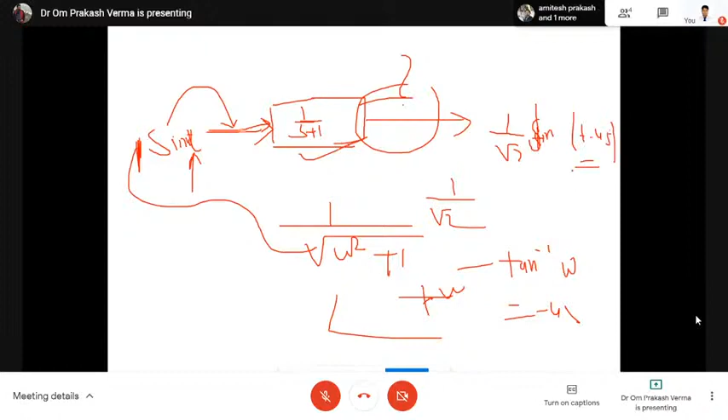We'll discuss this tomorrow. So when you put that in, only 1 by root 2 will come, and this is minus 45 degrees. So the final response is 1 by root 2 sine t minus 45 degrees. This is the answer to this problem. So you can calculate such problems like this.

The second question you asked is to again explain the standard test signal. Just try to read it; if the topic is not clear, you can ping me or call me, no problem. This topic will be covered, I have shown you this topic must be covered from your faculty. Signal system faculty and control system faculty both teach the same topics in the introduction, so there's no problem with that.

Please suggest a few books of control system. There are so many control system books available. If you want to study only control system, the best books are by I.J. Nagrath, M. Gopal, and B.C. Kuo. An Indian author book is also available, B.P. Rathi. For process dynamics, I would suggest three books: first Coughanowr's process dynamics, second Seborg's process dynamics and control, and for model development using data, there's a book from IIT Madras faculty, System Identification, written by Professor Arun Tangirala, IIT Madras.